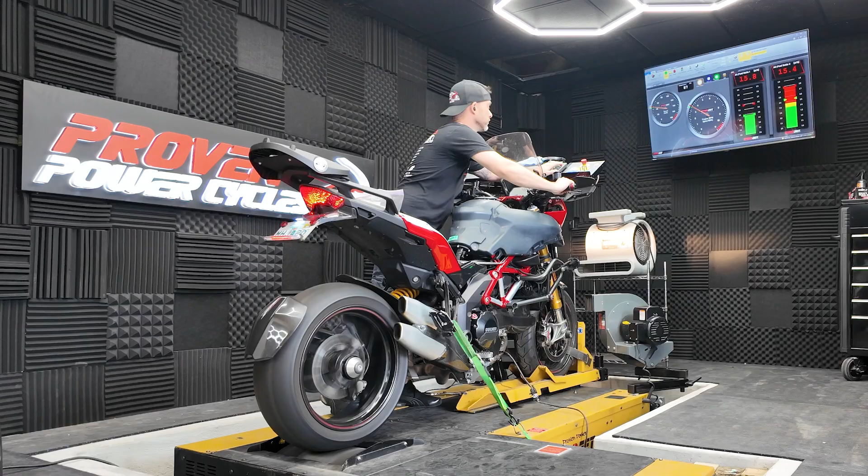Multistrada. Say it right. This sounds ridiculous! What's up, guys?

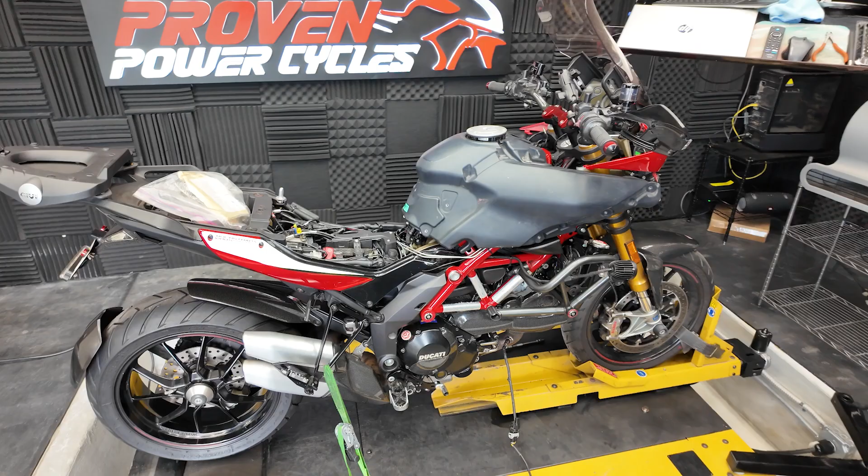It's actually from another shop that does a lot of suspension work, road course bikes, things like that. It's a local shop called Corsa Motorworks, great guys, they specialize in Ohlins suspension. Great group of guys, we really like them, we work hand in hand with a lot of projects. They primarily focus on road course style racing, which is still tons of fun.

But today, like I said, we have this Multistrada here. We couldn't tune it, so this has been a little bit of an ongoing project between us and them. We could not tune it based on the previous exhaust setup that they had, so they went and made modifications to the exhaust, put in some wideband bungs on the front and rear cylinders so that we can actually get a very good tune. We're gonna flash and tune this thing using Woolich Racing products, and give this guy a pretty damn good tune.

Right now we're getting everything set up. The last little step I gotta do is throw on the fans, the cooling fans here. They go on either side of the dyno, but once I get those last little bit of fans on there, then we can finally get the room up and running and get this thing moving. Really excited to see what this does. I'm gonna get the camera set up and try a couple different camera angles here and see which one works the best. But all in all, guys, welcome to the new dyno room, and let's get this thing tuned.

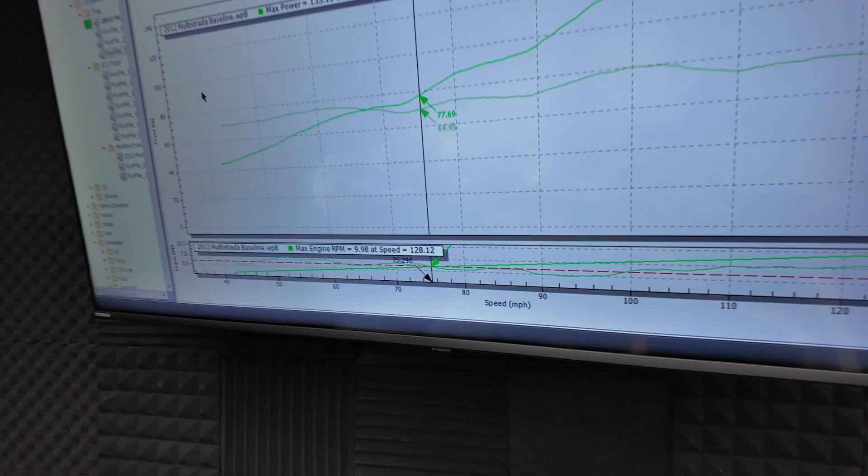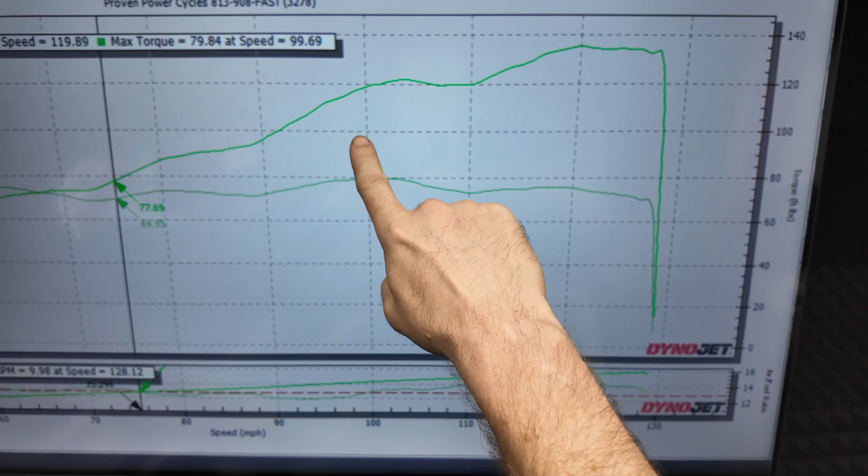But all in all, we did end up getting a full power run at full throttle, so this was the only one we could really get to do full throttle. So far we have hit 135 wheel horsepower with 79.8 pound-foot of torque. Notice on the graph here, we have this really dead spot, and it wakes back up here. We have a very lean air fuel, this is 14.2 AFR going into the higher RPMs.

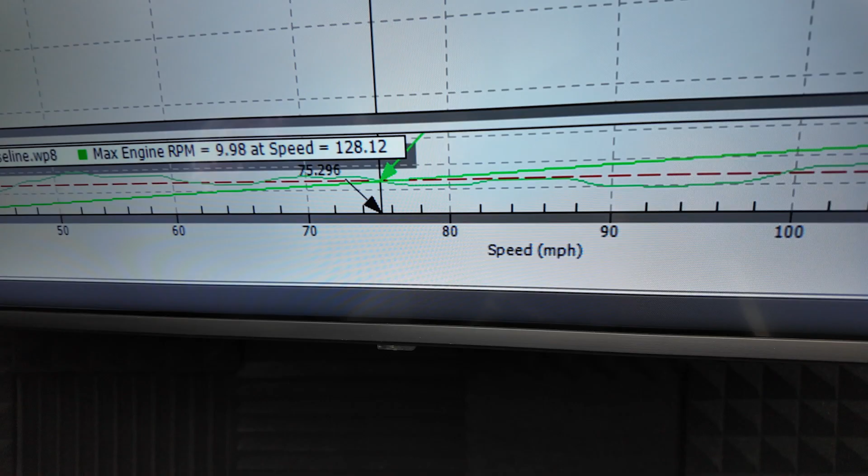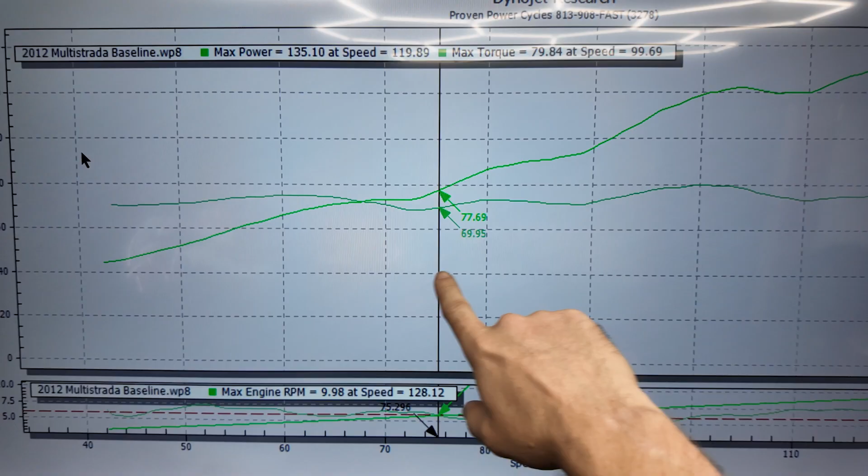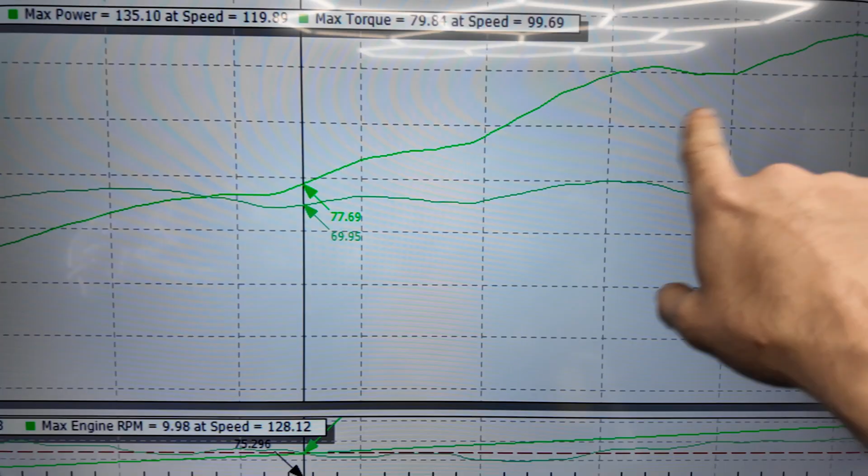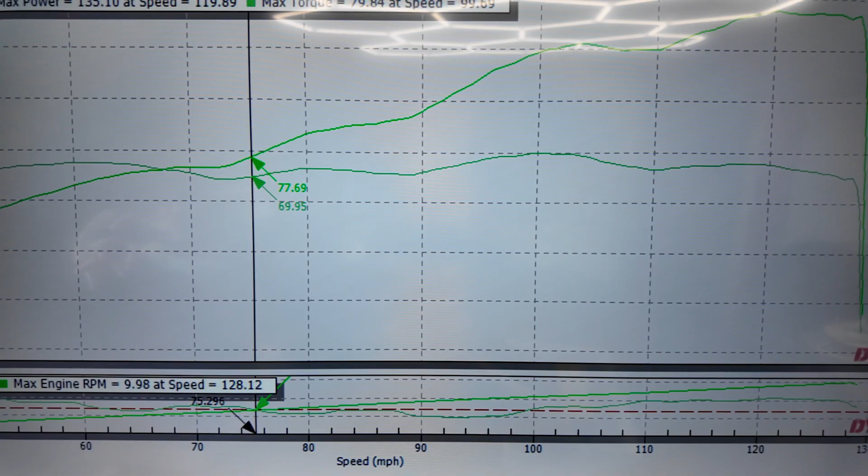Yeah, it's a little bit lean. This is cylinder 1 here, but at the end of it all we'll pull up the air fuels on everything and go over all of it. All in all, not too bad, we definitely have a lot to work with this graph, but I'm gonna get this thing cleaned up a lot. I'm expecting to pick up some power right in here, obviously up top when we enrich it all up, but we're gonna play around with some other odds and ends in there too. All this kind of lacking power, these hills and valleys, more or less kind of comes up, plateaus, comes up, plateaus, comes up, plateaus. So we're gonna do a lot of work with that and get that to smooth on out, get a much cleaner power band for them.

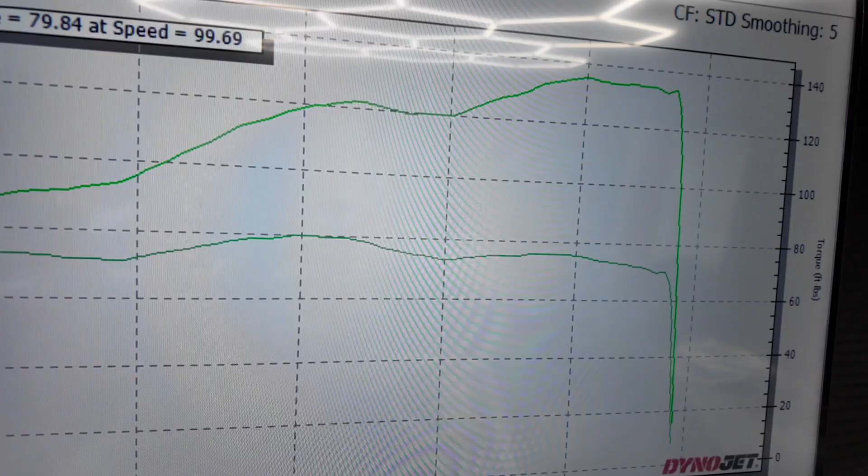So, on that note, let's get busy.

Alright guys, we got the Ducati all tuned and it jumped quite a bit. I'm actually really happy with the numbers. It's weird because the bike on one run would run rich, and then the very next run it would run a little lean. It had a little bit of inconsistency still, but that also might have something to do with the compensation tables kind of built in the background that we don't really have access to through the ECU.

For instance, just to give you guys an example, let's say coolant temperature rises to a certain amount, the ECU will do different things based on that coolant temperature setting. Same thing with intake air temps - if those go up, same song and dance, it might pull timing, it might pull, it might add fuel. There's these different things that bikes will do sometimes in the background that we can't really mess with in the stock ECUs, but not really saying it as an excuse, more so to educate you guys.

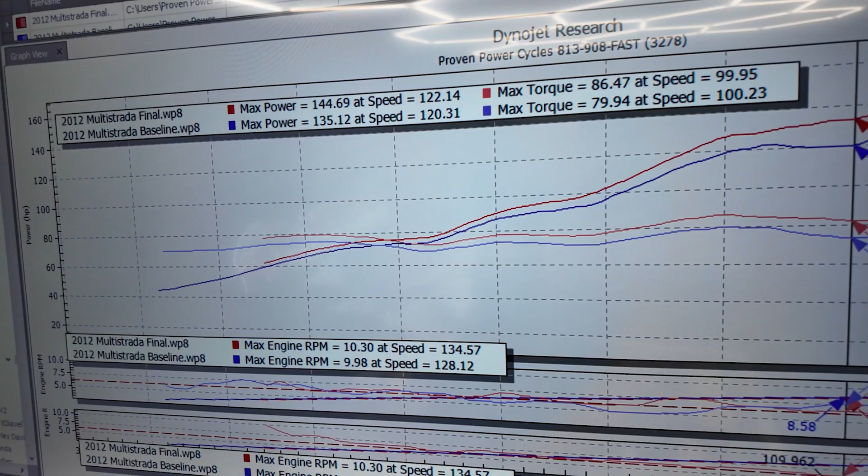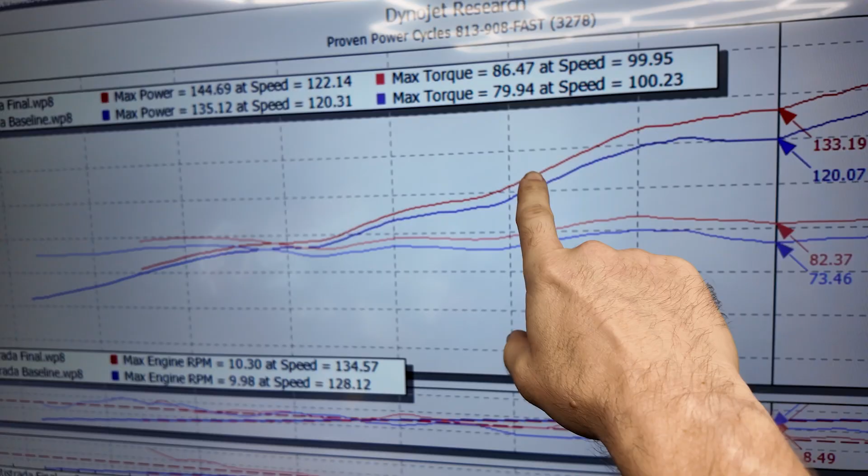So just to give you a rundown, we baselined at 135 wheel horsepower, when we could actually get a good run off. This bike was actually a challenge. If I showed you all the baselines, all the runs kind of end short because we were having a strange issue in the very beginning. The shop was involved, so we kind of diagnosed it with them. This was a while ago, but all in all, it came in at 135 wheel horsepower with almost 80 pound-foot of torque, and is ending with 144 wheel horsepower with 86 pound-foot of torque.

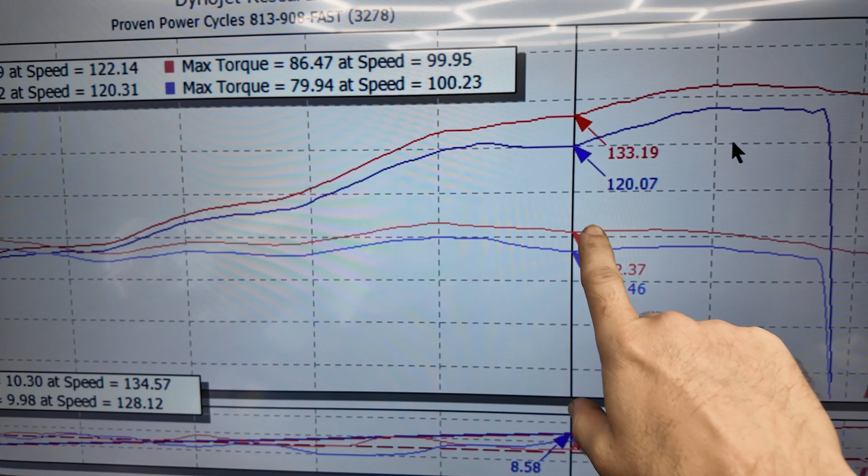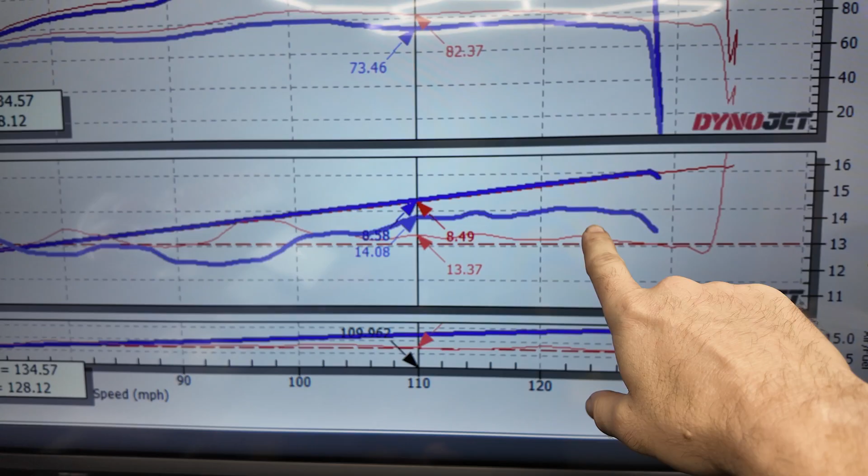Look at the gap we have here, around 8,500 RPM or so. We jumped from 120 to 133 wheel horsepower — a 13 wheel jump going into that upper RPM range. Cylinder 2 mimicked this, but we had a very, very lean mixture going into the upper RPM range, 14.0, it got all the way up to about 14.2 over here. And then it got a little fat here, and a little lean up over here at the top, which is kind of a normal occurrence that we normally see.

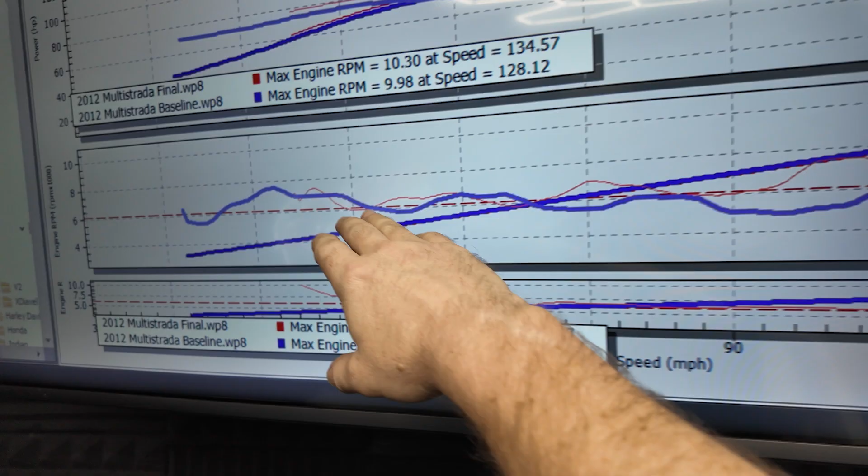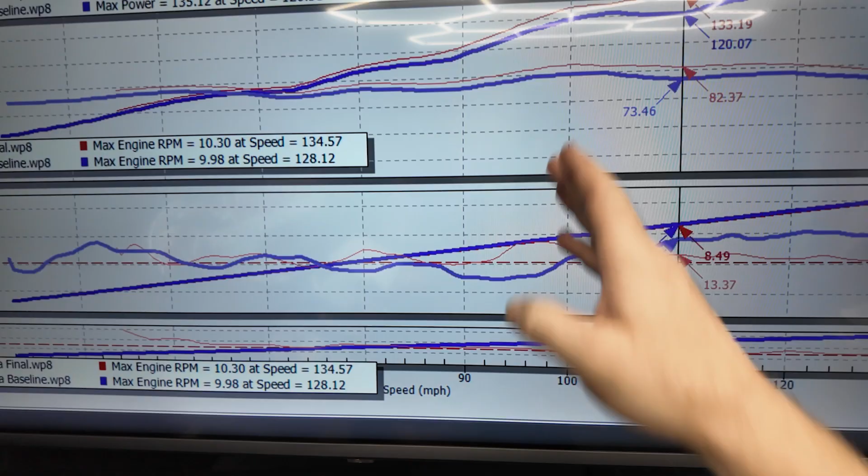Now I do have this exploded, so even a line that looks pretty tall is only a 13.3, but I believe this was like a 13.5. But oddly enough, right here at this spot on the RPM range, I don't have access to. So I have access right here, and then I regain access somewhere around the 8,500 RPM mark. So there's a gap in some of these jumps that you see here, a gap that I can't get to.

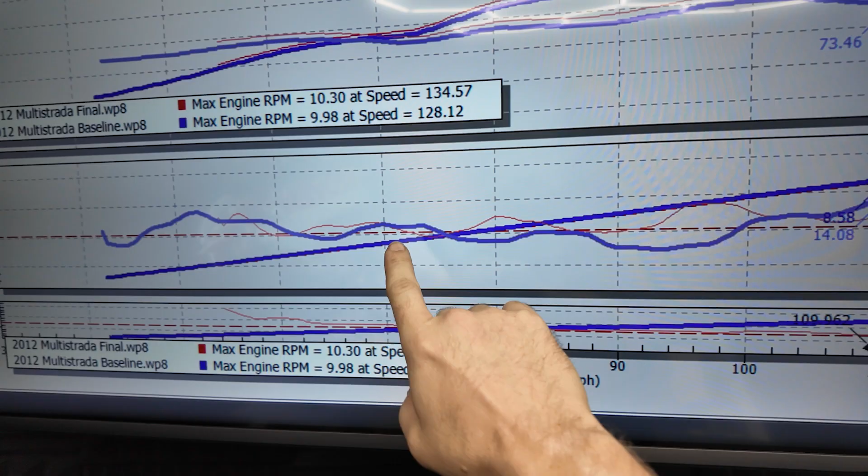All right, so that's for cylinder 1. Cylinder 2, yeah, you can see the gaps there. That's the final run, so you can see kind of in between. This is around 5,700, 5,800 RPM. It goes to around a 12.8, which honestly that's normal. And then I get it again around here, around the 6,400 mark, and we're at 13.3. So again, 1% off, when we start to get back into the groove of things.

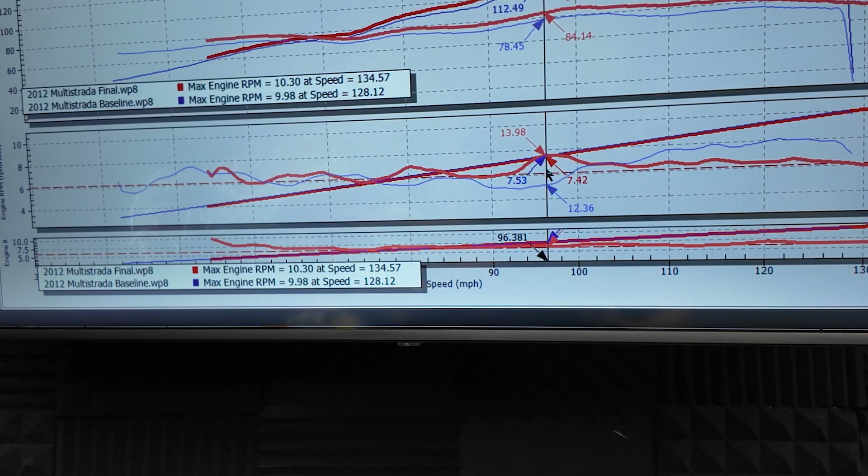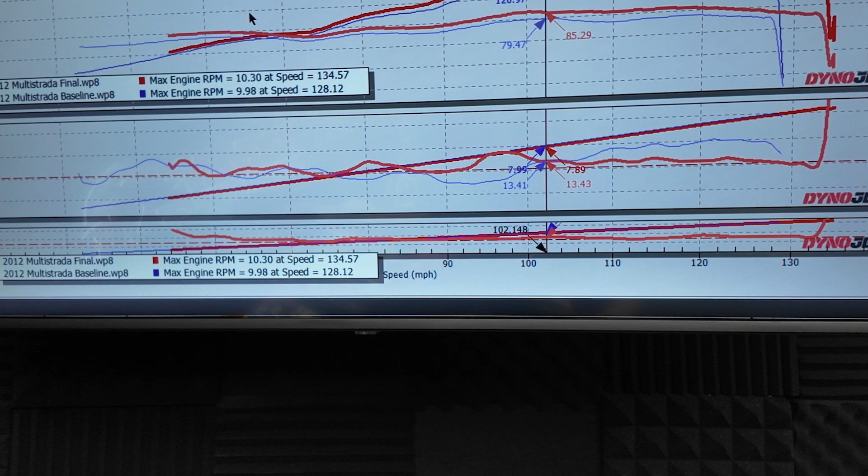And then right in this area, like 7,400-ish, I don't have anything to say about it. I get it back around here, around 8K or so — I get the control back. So we get these weird sweeps in the AFR, but all in all it's still overall happy. When I run consistent runs, it's pretty consistent, pretty happy. So cylinder 2, able to map it out, got it pretty damn close as well. We had a couple little lean spots in between sections, but we end up getting it back under control at the big end here. So all in all, great power.

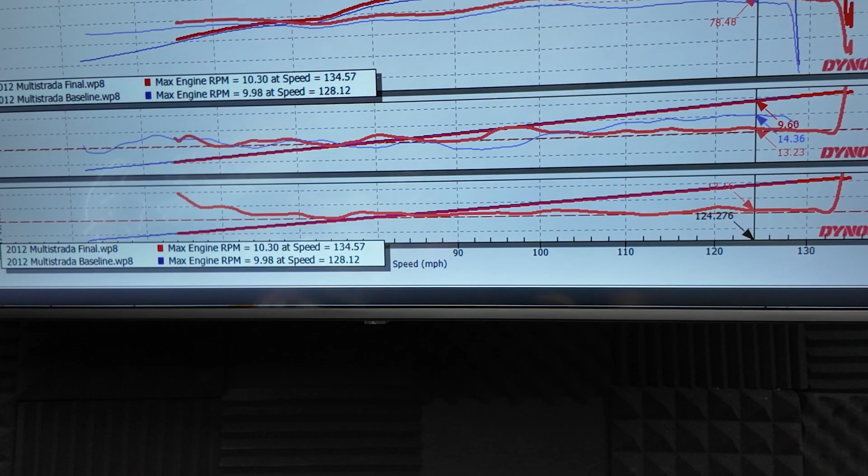And let's take the single graph, the comparison, guys. Massive gains. Look, before we were losing horsepower right in this range here. We started to lose horsepower and torque — if you look at both of them, we lost horsepower and torque, and then we started to pick it back up. So this thing rode like crap. Now we have no power loss. We have a slight plateau right here, but it gains again. So there's no power loss in this power band, it just keeps going up.

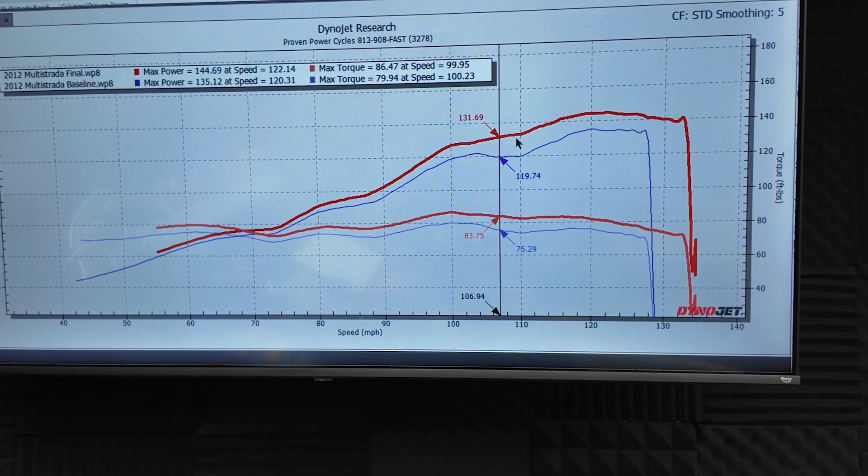So big difference — that's going to feel massively different when you're riding the bike. Instead of having a dead spot, like a little lurch, and then it kind of takes back off again and puts you in the back of the seat again, you're not going to feel that. It's just going to be a consistent pull through the whole power band now.

I know these aren't the most popular bikes out there, I get it, but all in all, you get the exhaust set up just right, and we actually have the ability to see the actual AFRs and do a real tune on this thing. That makes a world of difference, honestly, whenever you're trying to figure this stuff out. So all in all, glad we did it like that — 2 totally different maps per cylinder, they require different fuel mapping altogether. I'm glad we split it like I was recommending they do. Now they should have a much cleaner pull throughout the whole RPM range.

So all in all, I hope you guys enjoyed this video. It was a lot of fun to make it in the new room. I love my new room, it's pretty dope. We still have a little bit of work to go, obviously, still got some little things to do, but all in all, very happy with the room so far.